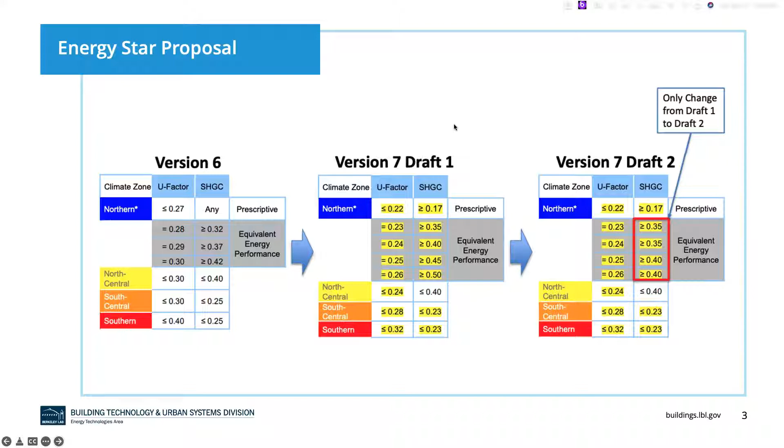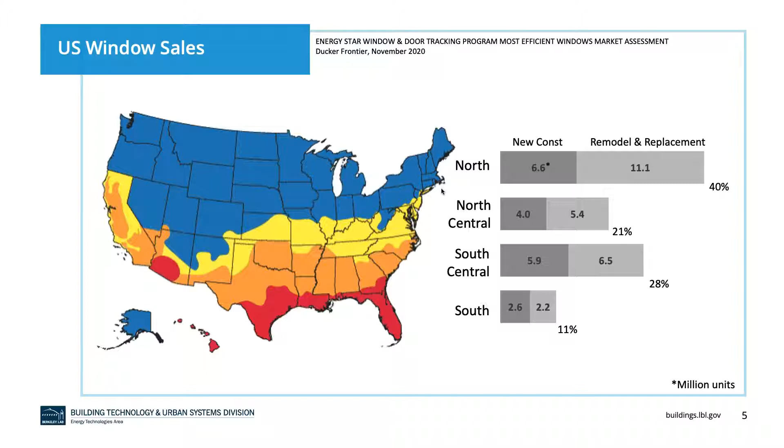So I'll start out by briefly going over some of the window sales data just to set some frame about areas that are important, what we're going to focus on. Of course, the northern and north central zones, looking at those changes to Energy Star, would seem to be the toughest to achieve. And those are important areas, right? So about 60% of residential units being sold right now are in those climate zones. So if you sell in that area, it's important to understand how to achieve those levels.

I have a little bit less data on the glass configurations that are being sold in the market. I'm sure others have some more granular data, but the latest FGIA study has somewhat of a breakdown on glazing types that are in the units being sold.

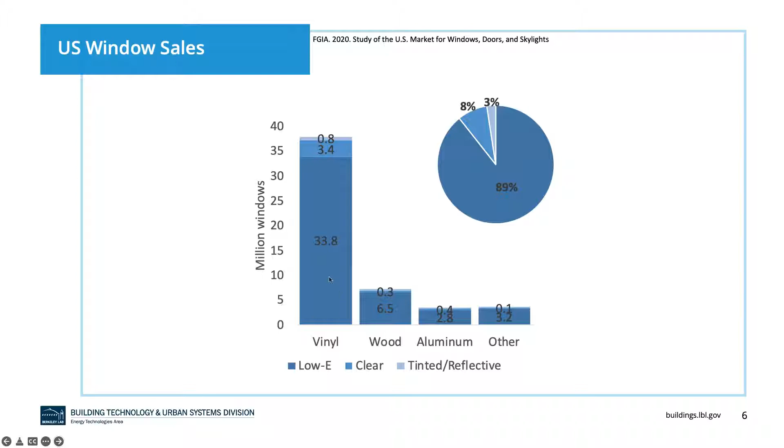And you see about 90% of residential windows being sold right now have a low-E coating in them. This goes along with 80 to 90% of windows being sold being Energy Star at this point. So that translates fairly well into that idea. So low-E is pretty ubiquitous in the market at this point in all frame types, whether it's vinyl, wood, aluminum, or others, it's pretty common in all.

On the spacer side of things, again, FGIA just kind of brackets things into, well, 99% are warm edge spacers, and that's really essentially anything that's not an aluminum box spacer, I guess is how I read that. They further divide that into rigid versions versus non-rigid. Rigid are these stainless steel, tin plate, U-shaped spacers. The non-rigid are your butyls, your foams, your rolled up type spacers.

And if we look at the database, over here on the right, double pane and triple pane, looking at just the number of products that are certified with these different types of spacers, you can see that the U-shaped spacers are by far the most common, followed by some of the non-rigid, the foams, thermoplastic spacers, and then finally some of the other stainless steel tin-plated type spacers. And there's, of these categories, 5 to 10 different spacer types that pretty much dominate the market on what's being certified.

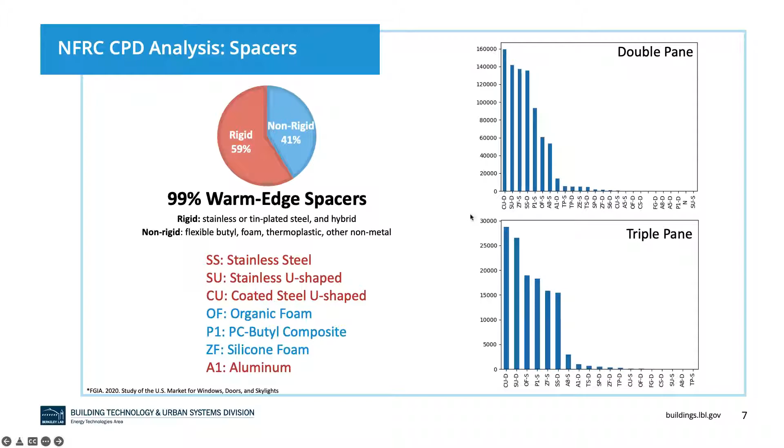So I'm not going to go super deep into spacers on this talk, but I wanted to mention that if you are interested in re-examining what you're doing for spacers, and want to get more understanding of how that's going to impact your performance, then I suggest looking at that. I've linked to different papers here. They're a little dated at this point, 2005, 2013, but the kind of analysis that's done is still very relevant. There's probably a few different spacer technologies on the market since this was released, but the process that was used in these is still applicable and can still help guide you on performance targets.

And one of the reasons I don't go into the depths in this talk is simply, I'm focusing on the NFRC CPD data, and other than spacer types that are being certified, there isn't much information in the database about that. In North America, we don't use, say, the psi value that they do in Europe, which would give you more insight into spacer performance. So really just the center of glass versus whole window U-factor, which brings in the frame as well. So again, if you're looking at getting more depth on spacers, I recommend taking a look at these publications.

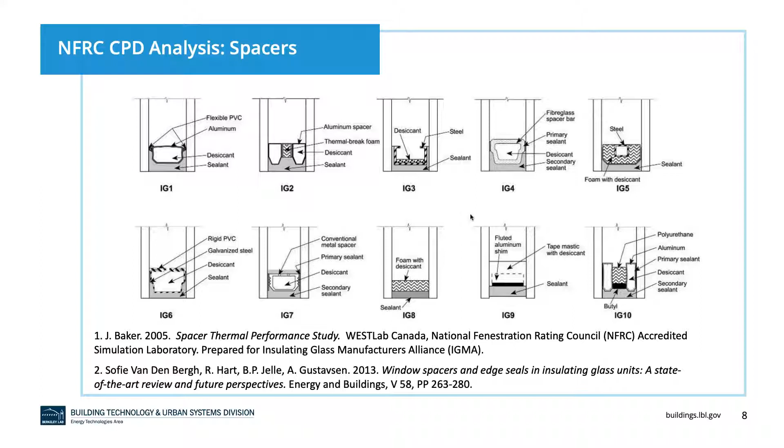So starting to look at glass, going deeper into the CPD here, looking at different glass and what's being certified. So I start out just like I did on the frames one, if you were on that: I'm focusing not always on double pane here, but on vertical sliders for most of my talk. Simply because that's 3/4 of the units being sold, and it's typically the hardest product to get to meet these performance targets that we're talking about. So in the interest of time, keeping it focused on one type of frame. Everything in here will be talking about vertical slider performance, and then double and triple pane units within that.

So this particular figure is just on double panes, looking at unique glass types that are being certified. Starting at the very top, the International Glazing Database has about 6,300 products. And of course, that varies by a few depending on which version you're looking at. So if you go into your Window software right now, you might see a number slightly different than any of these, but it'll be fairly close. The NFRC pound sign, which is layers that are approved to be used in NFRC certified products, is about 4,600 to 4,700 here.

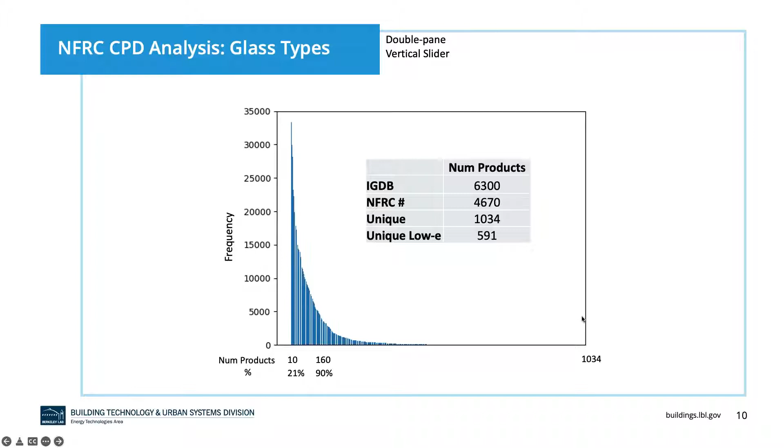And if we now boil that down to the double pane vertical sliders, there was about 1,000 unique glazing layers being used. About 600 of those are low-E coated. So that's a small fraction of what's actually available, but still a large number of glass products. But if we look at a histogram here, a frequency of what's actually certified, you can see that it's really concentrated to a few different layers. About 10 unique glazing layer IDs is about 20% of the products certified in the database. 90% of the products certified is about 160 different glass IDs. So again, only a relatively few number of products are actually being certified frequently, even though there's quite a few total.

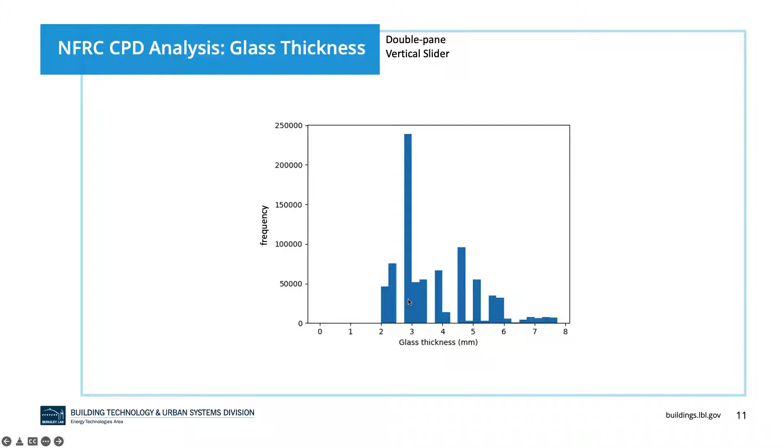Looking at thicknesses, there's no surprise here. The 3mm double strength glass is by far the most common being certified, followed fairly equally by the single strength 2 millimeter, 4 millimeter, 5, and to a lesser extent 6 millimeters. So really no surprises here. You can see 3 millimeter has been most common for quite some time.

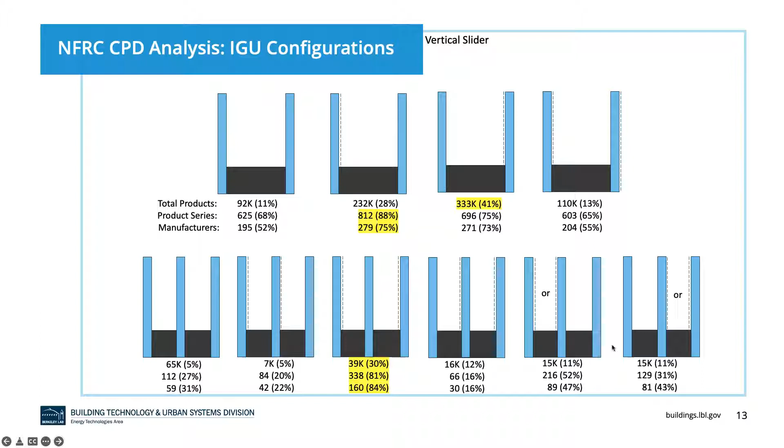IGU widths, so double pane in blue here. Of course, no surprise, 3/4 inch IGU, which is the optimal gap for your 3 millimeter glass, because you have basically a 1/2 inch gap between glass for a double. So that's most commonly certified. 7/8 inch actually isn't too far behind though, still pretty common.

Looking at triples, there's a peak at 1 inch. It has somewhat of a peak here at 7/8 inch. And you can see that the total number of products certified with triple pane and double pane at the 1 inch level are about the same. So quite commonly, if you have a double pane that can reach that 1 inch IGU thickness, you're going to certify that product line with a triple as well. So no surprises here on IGU widths.

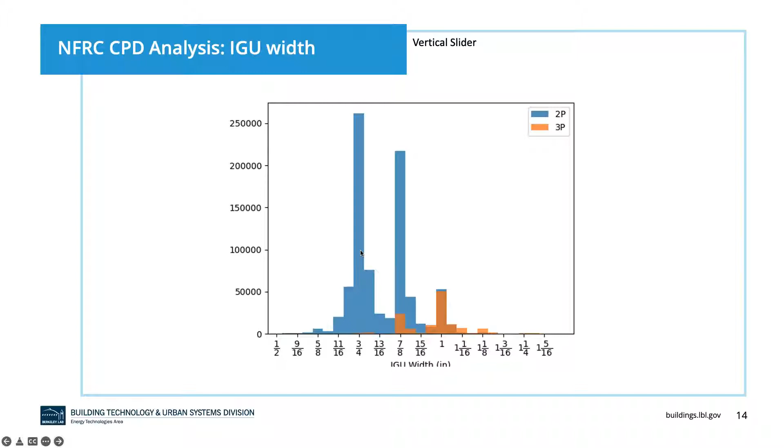If we take that to adding another dimension to that data in looking at this heat map, and I'll take a second here on the heat maps, because if you weren't on the last frames talk, there's a lot of these in this talk going forward, so I just want to make sure you understand what they're showing. This is just a 2-dimensional histogram, and just like on the last graphs, IGU width is on the x-axis; you can see these bands at the 3/4 inch, 7/8 inch, 1 inch IGU. We added a second dimension here of center of glass U factor.

And so, just looking at the peaks, center glass U factor around 0.25, 3/4 inch IGU, that is the kind of peak of performance, and these are the number of products certified, something like 35,000 products certified with that specific bin. And so, that's just how to read these.

Interesting here is, pulling this to 2 dimensions, we can see that there's a couple groupings here, right? So there's a group at this 0.3 center glass U factor, a group at that 0.25 center glass U factor with the double panes, and we'll take a look at that in a second.

On the triple panes, similar bands, right? We have the 7/8 inch, the 1 inch, the 1 1/8 groups on the IGU width. Although on the center glass U factor, you can see that they kind of blend together. There's no real differentiation, at least looking at it here. And that's because there's a lot more variables with the triple panes, right? You can have double coatings and lots of gas fills. There's lots more variations available, so you see lots of these bands.

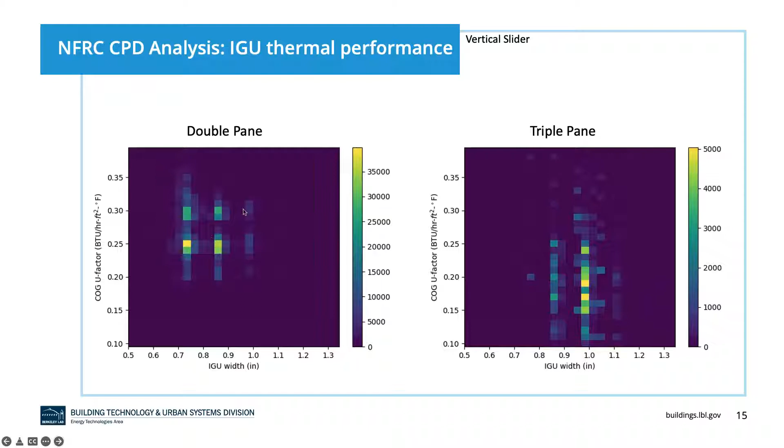But on the double pane, going back to this differentiation, if we want to try to understand that differentiation, separating out gas fills, so just air versus argon, we can see that really this accounts for that big difference that you see, 0.30 to 0.25. And summarizing it over here on the left, there's nominally about a 0.05 drop lower in U factor to switch to that argon fill.

Going to what the NFRC calls AR3, this argon-krypton blend of a product. You can see that this has a pretty wide range, but on average, it's about a 0.02 incremental benefit. And you can see this is typically used in the 3/4 inch, not the 7/8, simply because it's not necessarily needed at that larger gap between the glass. So you won't necessarily get the performance benefit by using it here.

And interestingly, with krypton, you can see that there really isn't much of a benefit at these gap widths to go from this blend to a full krypton unit, simply because you're just wide enough that krypton's optimum width is a narrower gap between glass. So you're not getting that performance benefit by going to it with these 3/4 or 7/8 inch IGUs.

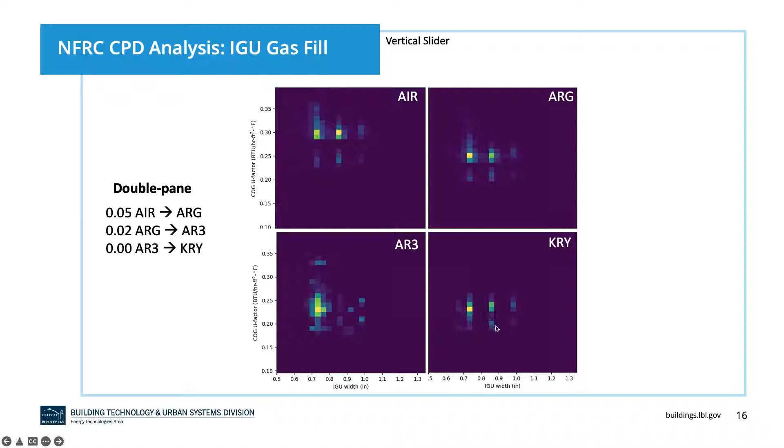On the triple pane, now when you separate them out, you can see more of that differentiation, and it's pretty similar to the doubles. Air to argon is nominally a 0.05 U factor improvement. To the argon krypton blend, it's a little bit better, 0.03. And again, typically with these triple panes, at 7/8 to 1 inch, they're undersized. So they're not optimum gaps like the double panes were.

And so you'll see now, from that blend to a full krypton unit, an actual performance gain again of nominally 0.03 on average, where this performance gets better. Again, because these units are somewhat non-optimum on their gap widths. If you get to the 1 1/8, 1 1/4, that's when you'll start to see that krypton will have less and less of any impact at all.

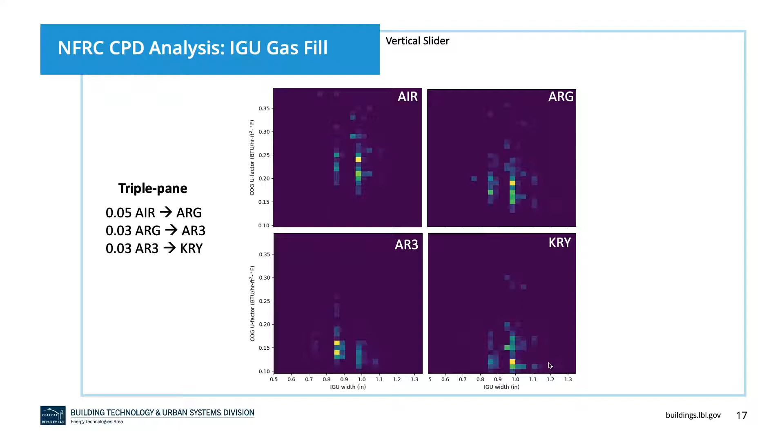So looking at how these units translate from the center of glass performance to the whole window performance. I've swapped out IGU width on the x-axis here to window U factor. And I've drawn this line of symmetry here. So if the unit had the same center of glass U factor as the whole window performance, this frequency plot would land right on this red line here.

And you can see that pretty much always the window, so your frame and spacer system, are going to make the U factor higher in the unit. You can see how that shift works. And this line isn't parallel. The slope is a little bit higher. So somewhere up in this 0.4 range or so, they intersect. And that intersects with your average frame spacer performance.

But if we just take a real simple look at the levels that are most commonly certified, down here in this 0.25 center of glass, 0.3 window U factor, you can see that nominally this window U factor is around 0.03 higher than center of glass. And of course, where you sit on that line is very dependent on your spacer and framing systems and how high those are performing.

Triple panes, it's a pretty similar curve, basically the same slope. It's just that it lies further down along this line here. You know, the performance is better. So you're kind of pulling further and further away from that line of symmetry. And at a typical triple pane performance level, it's something like 0.05 incremental rise in U factor for the window over center glass. But again, you can see that variation is fairly wide, really depending on those other factors outside of the IGU itself.

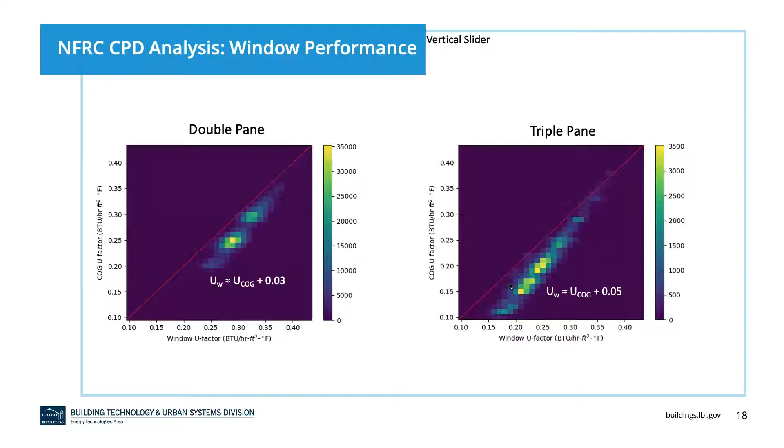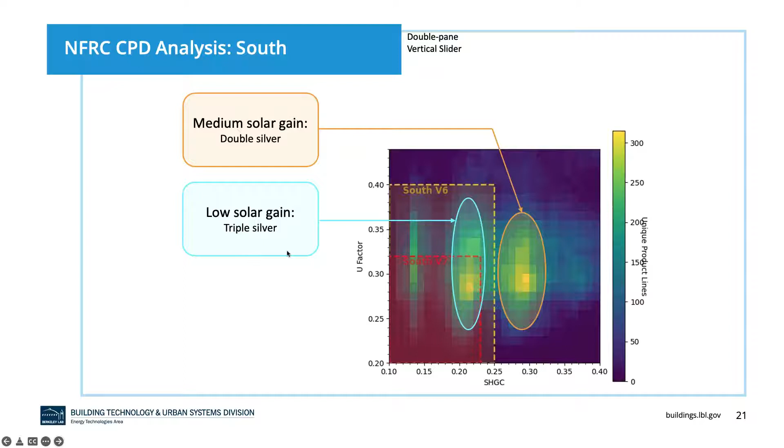And looking at some of these bands, what I call a medium solar gain, which is typically your double silver products, lying out here in this higher solar heat gain, 0.3 level. Your low solar gain, your triple silver type products at that 0.22, 0.23 solar heat gain level in these bands. So to meet version 6 and version 7, you really need to have that low solar gain, triple silver type glazing in your unit.

So in summary for the South here, you probably already have something that meets version 7 criteria. If not, of course, you need to use a low solar gain. That's really required. And argon gas fill. Those two, fairly simple, and you're most likely there.

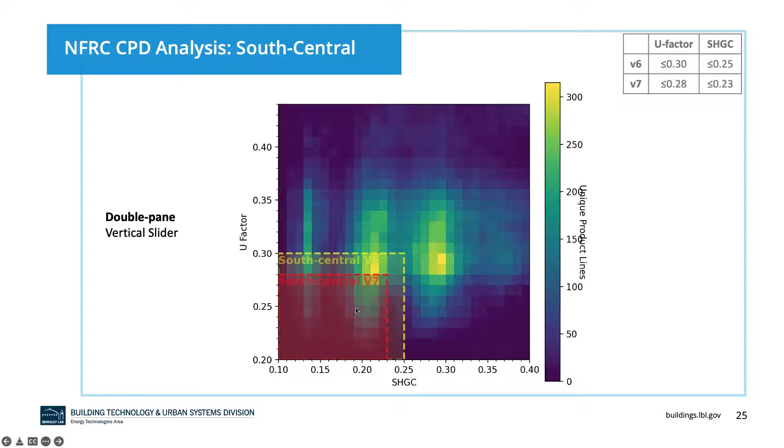If we just add another level to that, what we did to the South criteria, let's look at grouping the rigid spacers versus non-rigid spacers, again using those categories that I defined earlier. You can see that difference of the non-rigid spacers typically being in this most frequently certified range here.

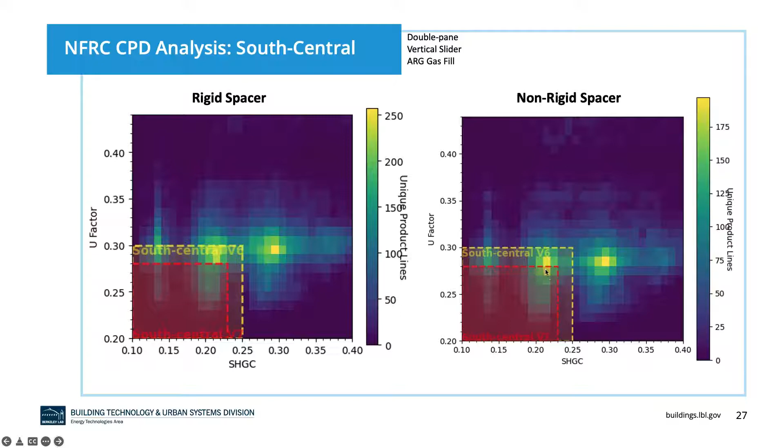So again, you probably already have a product that meets the South Central criteria. If not, low solar gain is always required here. Argon gas fill or non-rigid spacers, those are two good approaches to get there. Otherwise, or in addition to those, you may need to look at what frame you're using, and any insulation on the frame as well that may be needed to get you to that last little bit.

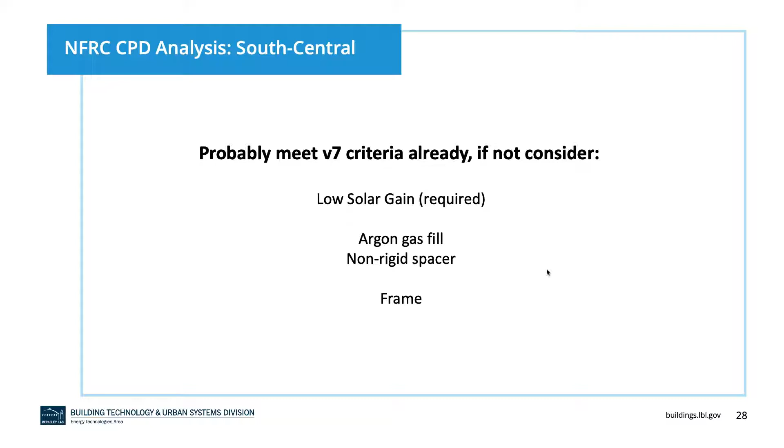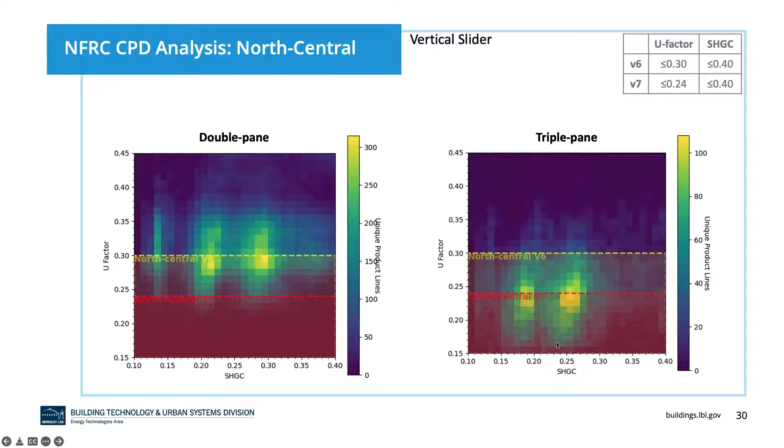So getting into the more complicated, more interesting ones here. North Central criteria, where we see a fairly large drop from 0.30 to 0.24 in the U-factor. So I'll start introducing triple pane products as well, because those become a viable option for meeting this criteria. You can clearly see that the triple panes are in that area now. And frankly, with triple panes, 84% of the product lines in the database are already reaching this. If you have a triple pane option, I think we don't have to talk about it too much. You probably already have a product that meets this criteria today.

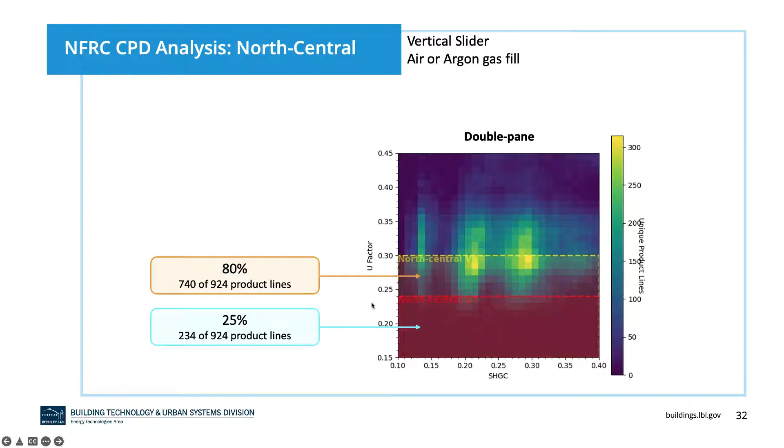So I'll focus on the double panes, where about 25% of the product lines in the database, again, this is vertical sliders, are meeting this criteria. So significantly harder to meet this with a double pane. In a slightly different approach than what I did on south and south central, I'll follow step by step a pathway to how you can reach this, or how most manufacturers are reaching this performance level, just scrolling through these changes of filters on the database.

So this first is showing all the products being certified, and you'll see as we go through this, the scale will change, because there's 300 plus unique product lines in the peak bin. It's this one or this one, I'm not sure which one, is your peak bin. But as we filter out results, the scale will change because there's just fewer and fewer products that meet that criteria. So the first filter here we can do is just argon filled. I'll flip back and forth a few times so you can see that difference. And really all we're doing is removing the air-filled units at that higher U-factor performance, knowing that those are going to be harder and harder to reach down into this high performance level.

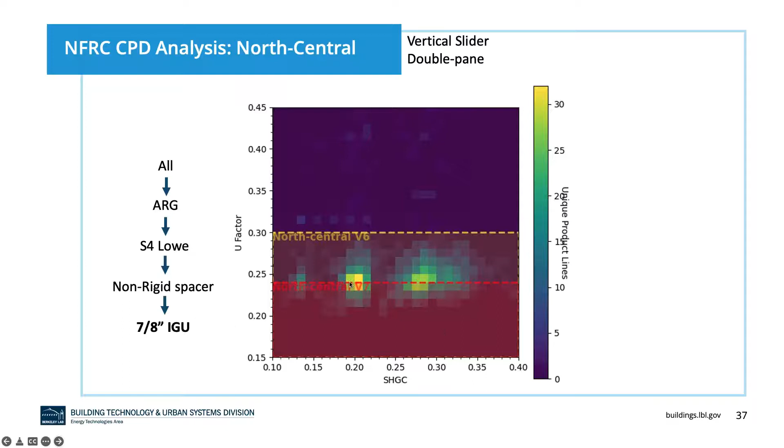The biggest jump in performance is turning on the surface 4 low-E. So if we have a surface 4 low-E coated product, you can see we dropped quite a bit, to 0.25, 0.26 level of performance is where you see the peak. Turning on another level of filters here, non-rigid spacers. So using a higher insulating spacer, now you see you're really right at that level, 0.25 performance level is your peak. And then one more level of filtration here at the 7/8 inch IGUs, turning off that 3/4 inch, and you can see now the peak is actually just inside the 0.24 level.

So this is a process if you're looking at meeting the criteria. This is how most manufacturers are doing it, and of course there's a wide range of performance in here. Some of these products that meet this are down at the 0.22 level, and that has a lot to do with other factors, such as the framing system and insulation in the frame and those sort of things as well.

So if you're looking for north central, not south central, if you have a frame that accommodates triple glazing, you already have a product that can meet this criteria. If you're trying to do it with double pane, you're going to need a low or medium solar heat gain coating. You're going to need a surface 4 coated low-E. You're most likely going to need argon gas fill, a non-rigid spacer, and a 7/8 inch IGU or greater. I don't put required here because it's certainly possible to do these without that, but you see the biggest frequency of use of these approaches in the database. And of course, I mentioned the frame here because that's still important. You still need to have a fairly good frame, and you may need to make additional changes to make the frame better as well to hit this performance level.

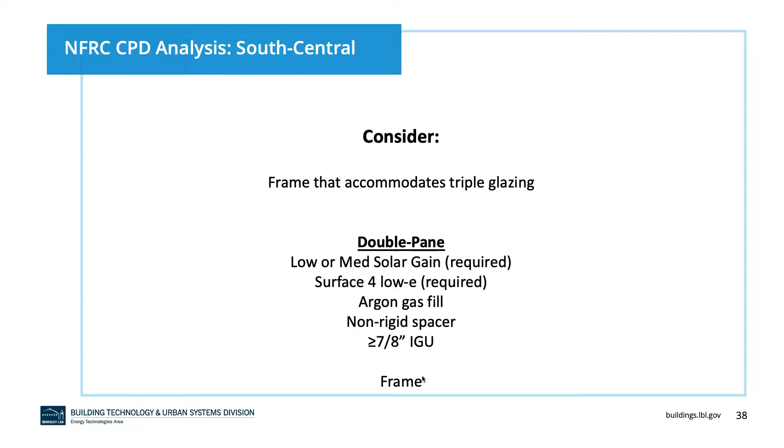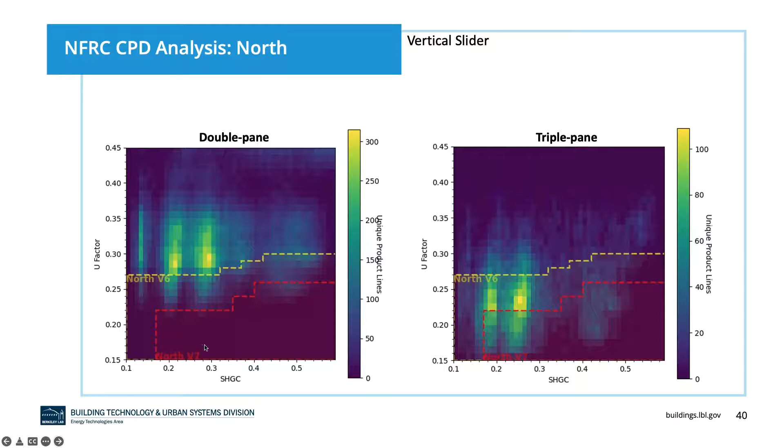So finally, looking at the north, this is updated to draft 2 criteria for solar heat gain. You can see these curves, or this trade-off criteria, has changed a little bit from the last presentation I did. But still, it doesn't change much here. Generally most products are not meeting it. With the triple pane though, you can see it is still quite common.

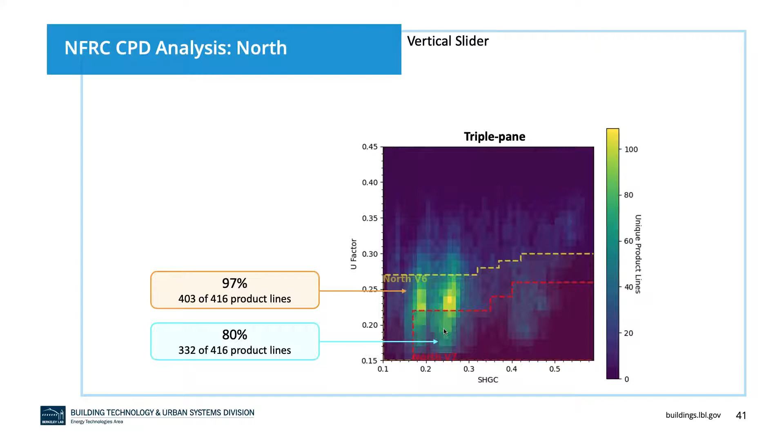It's a little bit less than North Central, but still 80% of product lines in the database are meeting this criteria today. So similar to the North Central, if you have a triple pane framing system or product offering today, you probably already have this solved for meeting this criteria. So we'll focus on double panes again.

So this is kind of a difference from what we saw before: 23% of the products, or 212 product lines, are meeting this revised criteria from draft 2. When it was in draft 1, it was about 16%, or 140 or so product lines that met that criteria. So definitely that little shift in solar heat gain coefficient brought in a lot more currently certified products into meeting this category here.

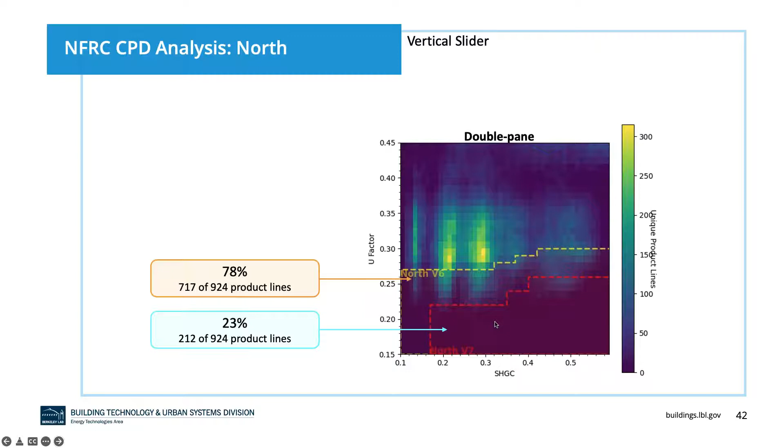If we rescale this to only look at products that are meeting the criteria, we can get a clearer picture of the pathways to do it. In blue here is the standard path, which is the 0.22 U-factor level. To do this, you take the same approach as what I just went through on North Central, except you start requiring some of those things that I said were most likely needed. To get that extra 0.02 in U-factor, you're going to need really high performance frames. You definitely need the gas fill, the 7/8-inch IGU, those sort of things. So it's just harder to reach it at that level.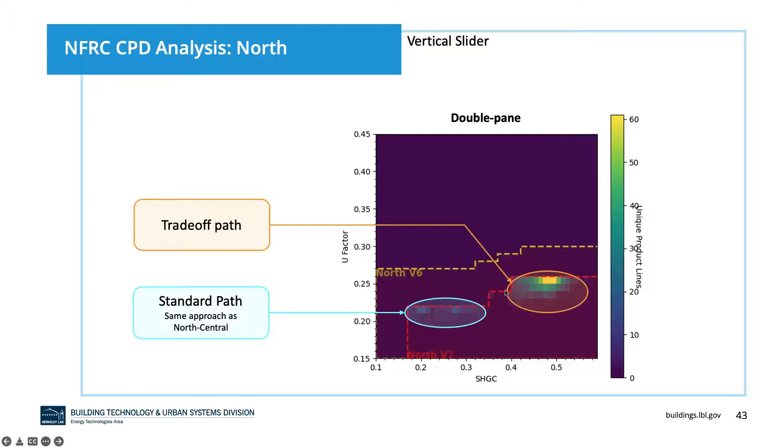The trade-off approach, of course, you can see by just frequency of products that are certified is an easier way to meet it. So we'll talk about that here using that same approach as North Central. Starting off with all units, then moving to argon filled. Again, all that does is pull units off the top at the higher U-factor levels.

But the biggest change here is going to a higher solar heat gain. We need these products to be higher solar heat gain to fall in this area. I'm using a somewhat arbitrary cutoff of center of glass SHGC greater than or equal to 0.45. That's not really based off of anything, just looking at the data and seeing where these products needed to be. The highest solar heat gain is typically your single coat low-E's that are meeting this criteria here. So that shifts us over to the right area as far as solar heat gain.

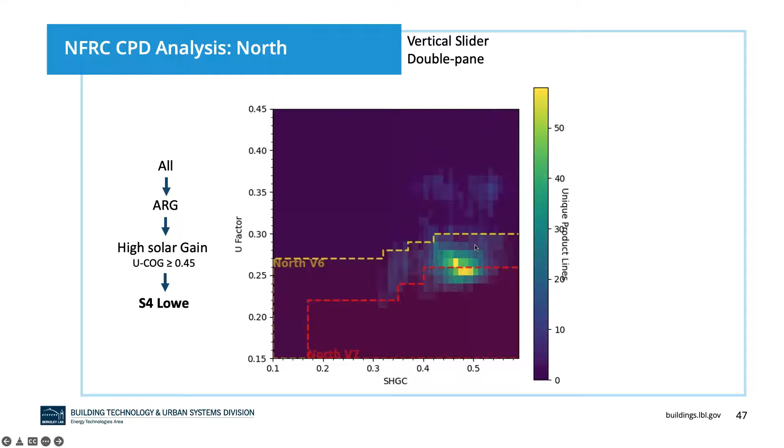Finally, if we look at surface 4 coated low-E products, we already get that jump down in the most frequently certified products over here at the 0.24 level. So that's really how you meet it here. In some ways it's easier than the North Central. We don't have to do that 7/8-inch, those sort of things. We're seeing that concentration of products already there with just these filters.

So what does that mean? Just in summary, again, triple glazing, if you have it, you probably already know how to get here. Doing the double pane standard path is going to require more things. Instead of argon gas fill, you might even need some krypton, either a blend or full krypton fill. The 7/8-inch, the non-rigid spacer, and you're going to need some sort of foam filled or insulated frame to get there using the standard approach.

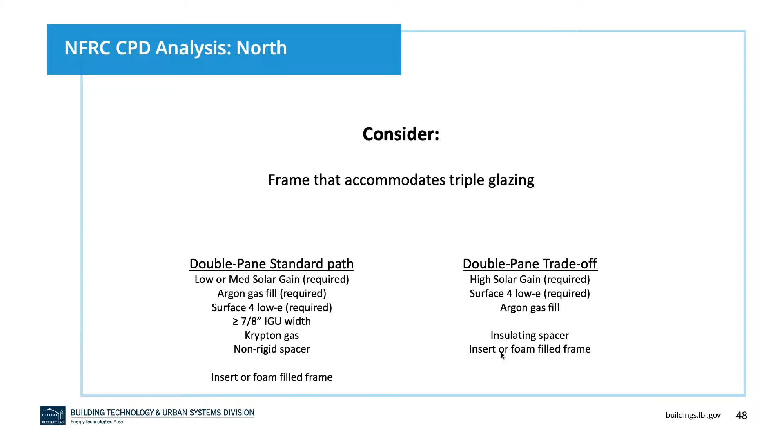With the trade-off approach, you need this high solar heat gain product. The surface 4 low-E, you most likely need the argon fill. And then, kind of separated here, but you probably will need an insulating spacer as well, and some sort of improved frame to be able to get that performance target, or one or the other or both to get there. But it's certainly doable, and like I said, a quarter of the manufacturers already have a product certified in that level today.

So that's it from me. Hopefully that gives you a good summary of what manufacturers are doing and how you can reach those targets.

I don't know, Jessica, if you're going to, or Sean, are you running yours? Oh, sorry, I am muted. Yep, I have it. I'm pulling it up right now. Okay, perfect.

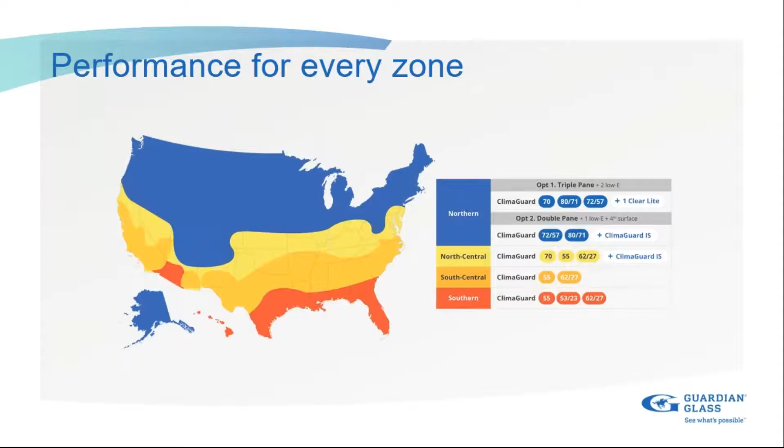Yeah, hi everybody. So yeah, I think Suresh, you can jump in here as well, but just to dovetail into Robert's approach, as many of our other members of the NFRC, we've been watching this closely develop, and part of what we've done is we use the certified product database as a baseline as well. So looking at each of these zones, we're cognizant of that. Triple pane up north seems like a pretty easy solution the way that Robert framed it up. But from a manufacturing standpoint, that doesn't necessarily benefit as far as on cost. It may be a higher cost.

So what we've done is we'll look at both the U value as well as the high solar heat gain requirements. And what Sean put together here on this slide is representative of what would meet Energy Star 7. There are some assumptions that go into that though, which Robert also spoke to. And we look at it kind of like Tom Culp does well in some of his presentations, an a la carte approach.

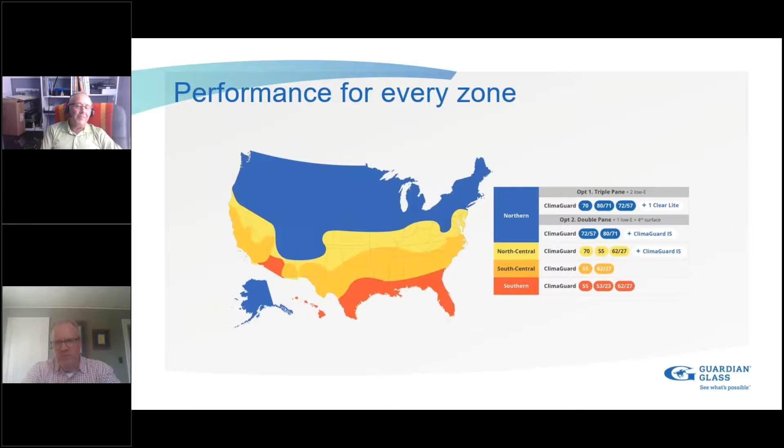We feel, and we agree, that likely on the lower left-hand side, you're going to lose some of those poor performing frames. If you come in with a decent frame, a double pane we feel is very, very likely doable. And what you'd see is that some of those are required, such as most likely argon, most likely a fourth surface, no matter what. But then that's where you get into some of the details of what kind of spacer system do you have? Is it full warm edge? Is it foam or not? And you start shaving off to the third decimal point in the rounding.

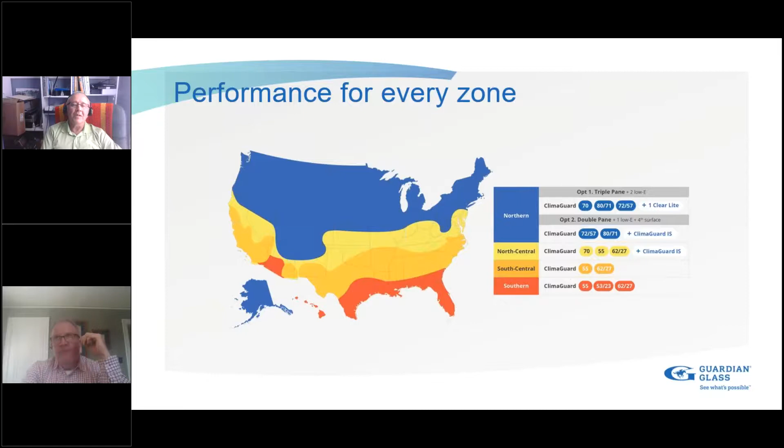So I think just looking at that heat map, it reminds us of how we've been looking at some of the currently certified products, and whether or not we're seeing the same trend. There may be less in the heat map type representation, but we're confident that we have what can get you there in a dual pane configuration, if you have a decent frame to start with. And Suresh, I don't know if you want to talk about the zones there.

Yeah, just a clarification there. Thank you, Raymond, on that. When we look at both the northern zone and north central zone, if we want to meet Energy Star V7 with the double pane, you really need a fourth surface coating. And this is where Guardian ClimaGuard IS, which is a fourth surface coating that we have positioned for a long period of time, and we have a lot of history with it. And same thing in north central. You would need a fourth surface coating to meet the north central U factors.

For the south central and southern zones, Guardian has the triple silver coating portfolio, which is 6227, 5323. These would help meet the Energy Star V7 requirements. We also have a double silver coating, ClimaGuard 55. Depending on the frame type and things like that, it could also be an option to meet Energy Star V7 in those two zones.

Okay, so as we think about Energy Star V7, Guardian is proactively preparing to help our customers meet Energy Star V7 with double pane, preferably. If not double pane, triple pane in the northern zone. But based on what Raymond said, and based on Robert's earlier discussion, Energy Star V7 can be met with a double pane using the argon fill and the fourth surface low E coatings. So that's based on the analysis we have done.

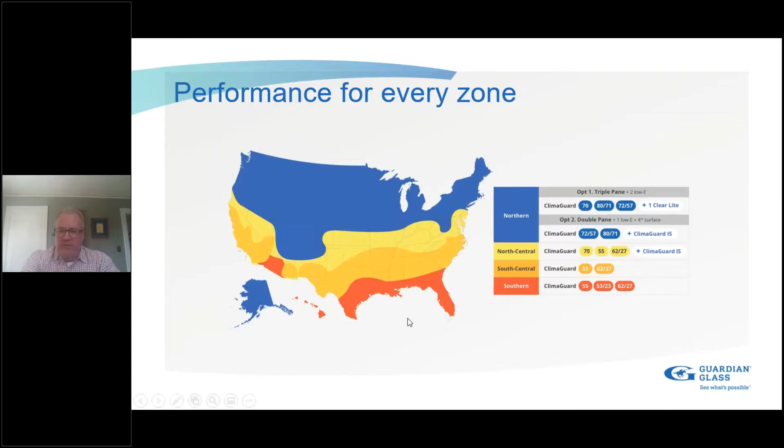And I think the point we want to drive home, Raymond and Suresh spoke to this, and Robert in his presentation: everyone's different. This is very nuanced. So please reach out to us. Jessica's going to share our information at the end of the webinar, and let's start having these conversations, really understanding what your goals are for Energy Star version 7, and really leverage our technical team and our product portfolios to come up with a solution that works best for your long-term goals, because everyone's different. Everyone's got different plays in different regions of the country and different aspirations as far as Energy Star version 7.

So if there's questions or comments, please feel free to reach out to us and get us engaged early, because even though the implementation timing still isn't set in stone, it's going to be here before we know it.